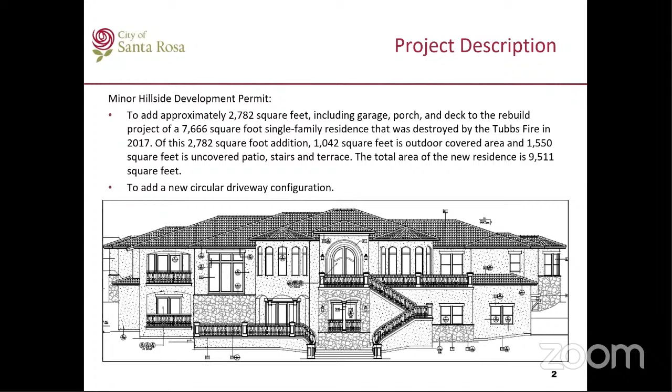So here is the current site. As you can see, the previous house had 2 driveways. One driveway was accessing from the north, and the other driveway, added in 2003, is accessing through Rincon Ridge Drive. The parcel is zoned PD, planned development, and the general plan land use is very low density residential.

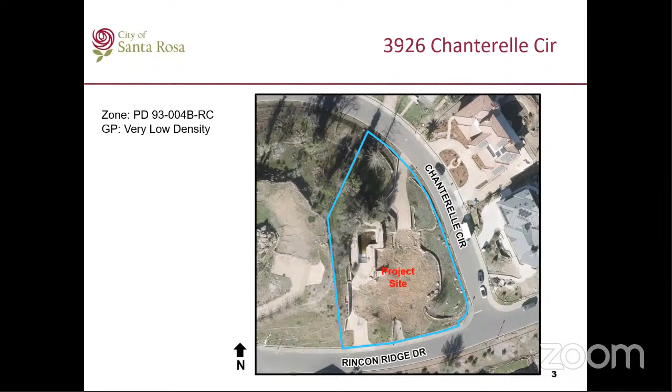This is the previous house. Again, as you can see, 2 driveways were provided for the lot, and the new project will remove the driveway along Rincon Ridge because they are going to have only one driveway. So this driveway will be abandoned and closed, and a circular driveway will be added along Chanterelle Circle.

So here is the proposed site plan. As you can see, the driveway on Rincon Ridge will be removed, and the new driveway will be added on this area and connected to the existing driveway on Chanterelle Circle. The majority of the house is going to be on the same location.

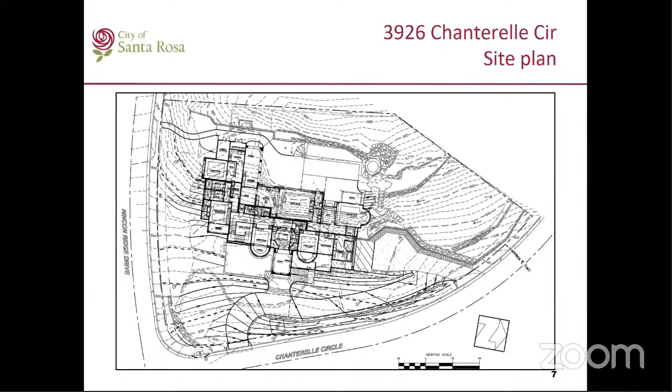Here is the slope analysis. At the center, you will see slopes between 10 to 25% where the house used to be located. Let me show here - there you go. The majority of the addition is in this area that is sloped less than 10%, and you can see here where the new stairs and porches will be located. The driveway will be located on an area with more than 10%.

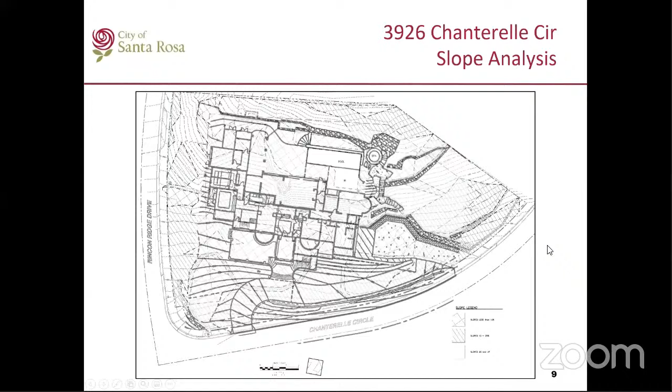And here are the contours of the lot. Again, you can see the new addition is going to be located in this area that has slopes less than 10%, and the driveway will be located in the front. In our zoning code, Hillside Development Permits allow driveways to be placed within the hillside area as long as they are not placed on slopes with more than 25%.

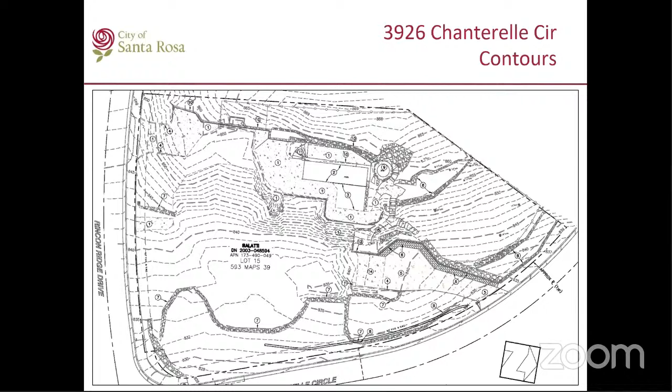And here is a section from the site, and here is the majority of the addition in the red box where it's going to be located. As you can see, here is the driveway where there will be some grading, but the new addition for terraces and porches is majority on a flat area, as you can see in this section.

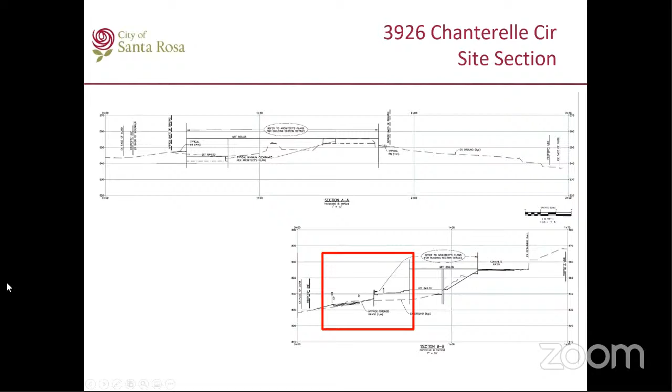Here is the right side elevation of the site. The maximum height has to be 35 feet. It cannot exceed 35, and the applicant is proposing 33 feet and 4 inches.

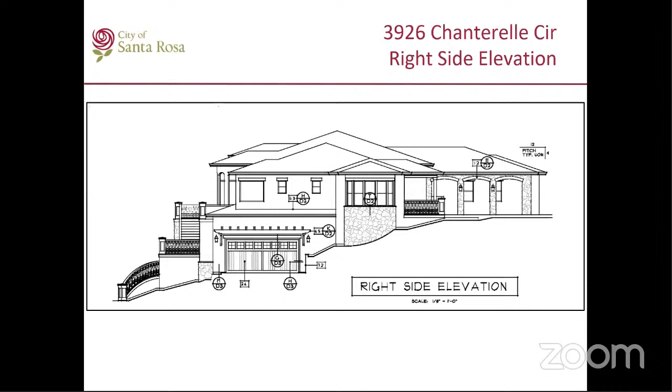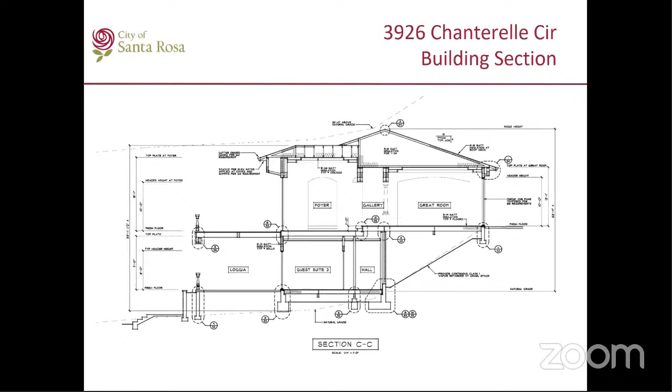Here is another section that shows the natural grade and the height does not exceed 35 feet.

So the notices were sent out. We received a public hearing request for today, and the comments and concerns were regarding the height of the proposed building and also about the project having to comply and meet with the CC&R's requirements. The zoning administrator cannot approve the project because it needs to be approved by HOA. Staff has to mention that the city does not enforce HOA, and zoning code law exceeds HOA requirements. I believe the person who had those comments is also available today, and the applicant is also available to answer any questions related to HOAs.

With that, the project has been reviewed in compliance with the California Environmental Quality Act and qualifies for a Class 3 exemption under Section 15303, in that the project is the construction of a new single family home with minor expansion. The Planning and Economic Development Department recommends that the zoning administrator, by resolution, approve a minor hillside development permit for the property located at 3926 Chanterelle Circle. And that was my presentation.

Thank you. Thank you, Manette. I have no questions. Your presentation was complete. Now it's an opportunity for the project team or applicant to comment or provide more information. If you wish to do so, please raise your hand. You'll be recognized.

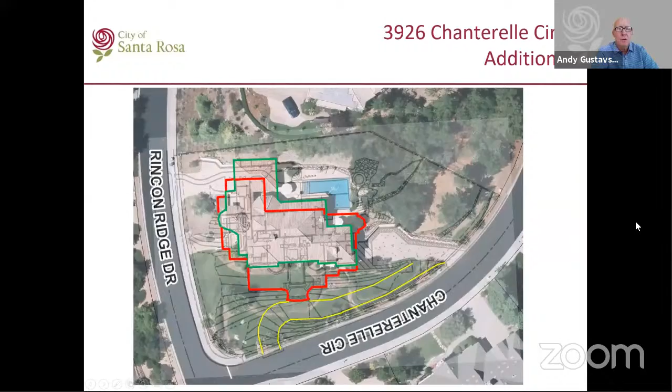Well, I think you're pointing out that this Hillside development permit is being brought to the zoning administrator because there's an addition to the former house. The former house was 35 feet or less and 2 stories, and the addition would not increase the overall height, but expanded toward the downslope side and would not impact the view or change the previous view. It's going to be a similar location. So in this left elevation, basically those front terraces and steps are the additions. Okay, well, thank you for pointing that out and clarifying that.

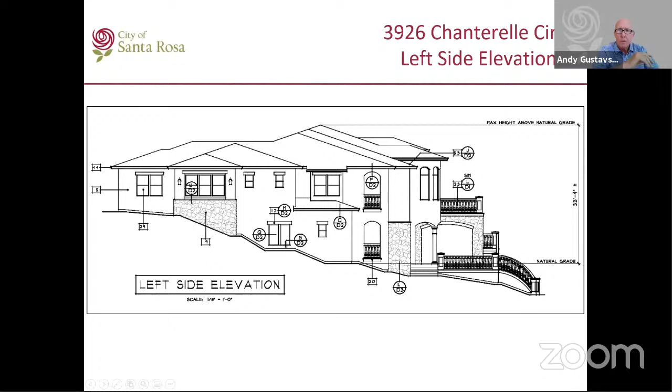I've reviewed the resolution that you prepared, and the findings you make and the conditions of approval provided are appropriate for the Hillside development permit and this proposed replacement home. So with that, and the conditions of approval, I will approve the project as proposed.

As I said earlier, any determination made, including the approval of this project, may be appealed by the end of the day, September 27th. Thank you. All right, let's move on to item 3.2, another Hillside development permit at 3607 Crescent Circle. The project planner is Conor McKay. Connor, are you ready to give your presentation? Yes, I am, thank you.

What? No full screen mode. Well, is this okay? Can y'all see this big enough? Connor, close the editing on the right and the full screen will work. Oh my gosh, thank you so much. Yeah, I've made that mistake before. And there's my camera. Thank you so much, Mr. Zoning Administrator. My name is Conor McKay, City Planner. Connor, can you expand it a bit more, or is it fully on the screen? Maybe I need to shift my screen to the larger computer. What do you think? Go ahead, I guess, on my end, sorry. Kimberly, are you able to see it? It looks full size to me.

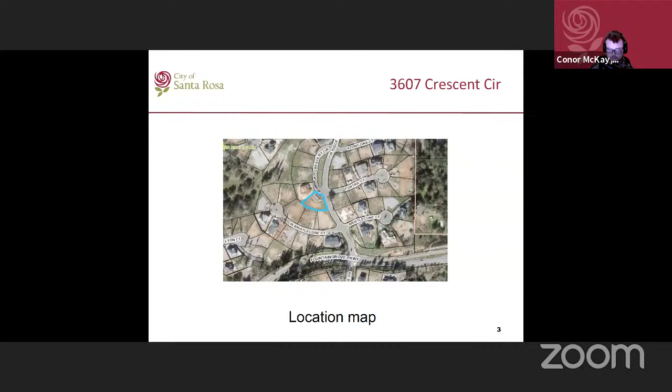This is an interesting project because the site was over-excavated by FEMA when FEMA was conducting its site remediation and cleanup. So there is a considerable amount of fill being brought back to the site, but the actual elevation of the site is similar to what existed prior to the fire. Also, the applicant initially proposed even more fill, but with consultation with staff, we agreed on a compromise to reduce the introduced fill.

That still allows for a driveway to be constructed that is not exceeding 25% slope. Any less fill introduced to the site would result in an overly sloped driveway.

We did receive questions from some neighbors about drainage and the overall slope, and what might happen in a weather event. I spoke with the engineer who reviewed the project, and they said that compliance with the conditions of approval and Exhibit A, which discusses drainage, would result in less than significant impacts to neighbors lower on the hillside in the event of a weather event.

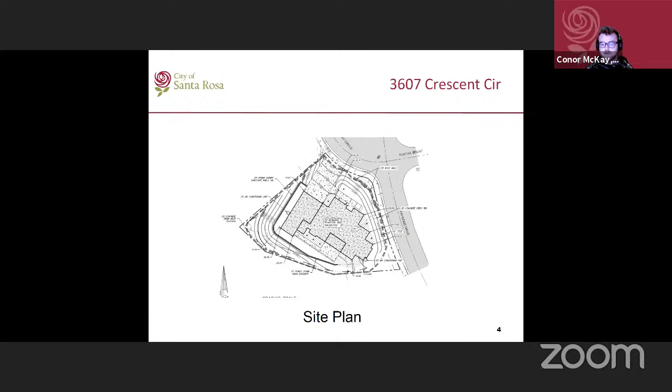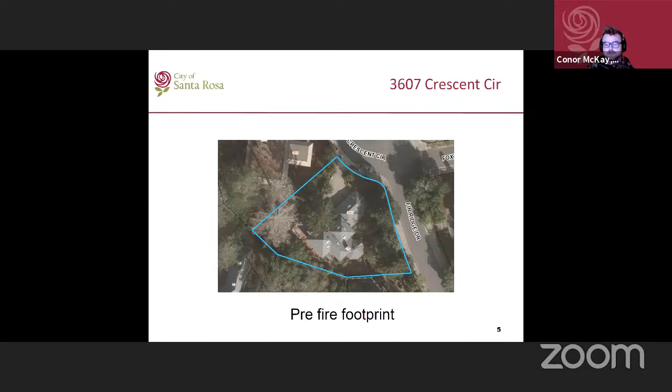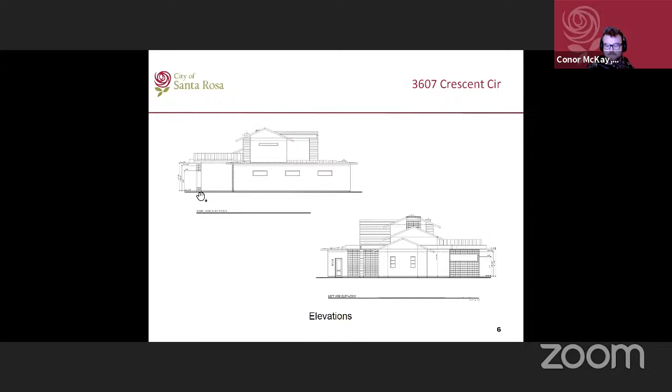So here we have the pre-fire footprint, an aerial of what the location looked like before the fire, and we have architectural elevations and architectural renderings.

With that, the Planning and Economic Development Department recommends that the zoning administrator, by resolution, approve a hillside development permit for the rebuild of a Tubbs Fire lot at 3607 Crescent Circle, which is adding additional square footage compared to the pre-fire square footage in areas of 10% slope or greater. I'm available to answer any questions.

I do not believe the applicant or the design team are present to answer any questions, unfortunately, but we will do our best to respond to any questions that may arise. Thank you, Connor. Again, I want to offer the opportunity should any member of the applicant's team or owner be on the call, please raise your hand and be recognized. Seeing none—oh, I do see Josephina has raised her hand.

Are you part of the project team or applicant? If so, please comment. I'm a neighbor, and I have a question. Can I have one moment, please? I just want to make sure you'll have the opportunity as a neighbor to comment, but I want to confirm the project team or owner is not present, though Connor did say they're not. Just give me a moment here. Okay, apparently not. Okay, sorry Josephina for the interruption.

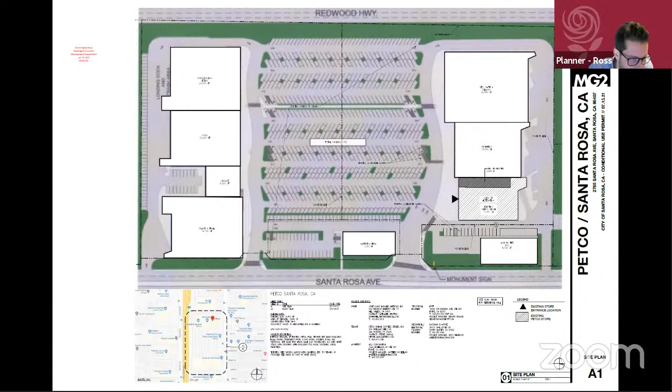And I think if you go down to the next page, Kimberly, that's you. Yeah, perfect. So this is the internal conversion of the site as well. There's no additional space, no outside modifications proposed with this project. It's within the general commercial zoning district, retail and business services, which this use is allowed via minor use permit approval. With that, concludes my presentation.

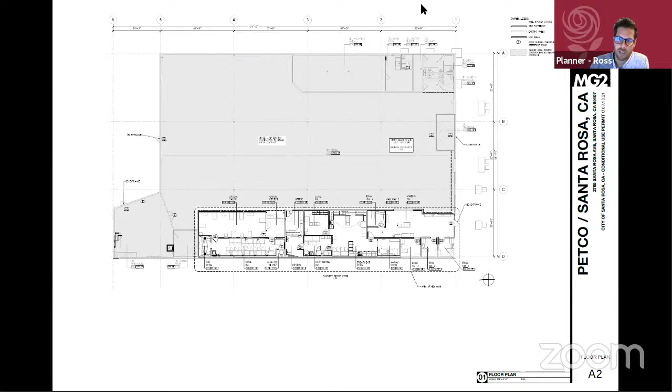I'm unsure if there is applicant staff on the call or the Zoom call, but I can answer any questions, and if they are, I'm sure they'd raise their hand. Thank you.

Thank you, Adam. So to clarify, this is really occupying a portion of the existing pet retail store. It does not intensify the use and there is no exterior change. Correct. Excellent. All right. Is there any member of the project applicant team or applicant that wishes to comment?

If so, raise your hand. Seeing none, I will offer the opportunity for any member of the public in attendance who wishes to comment on this project. Please raise your hand and you'll be recognized. All right, seeing none, I'll close the public hearing.

Adam, this is a very straightforward internal repurposing of use, accessory to, compatible with the existing pet store. No intensification, as you noted in your presentation, in terms of parking or change. So this is a project that can be approved as recommended, subject to the conditions of approval. Appreciate you bringing this forward.